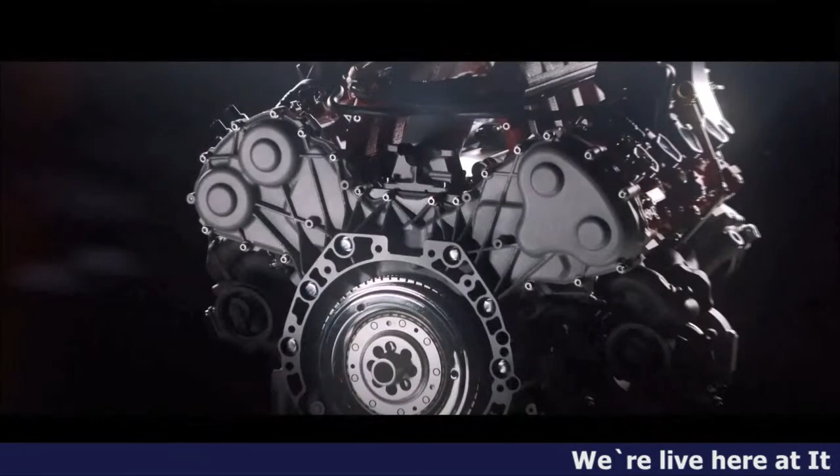Can you imagine the cars and the motorcycles of the future? Will they be connected to everything? How will their design change? How will the engine of tomorrow work? Maybe motor vehicles will turn on just with a glimpse, or be as fast as your thoughts.

The truth is that imagination requires talent, but above all, skills and training tools that only a great university can offer. This is the reason why MUNER, the Motor Vehicle University of Emilia-Romagna, was born.

A campus as big as an entire region, where the brands that made the history of the automotive industry and the main universities of Emilia-Romagna merged together to design the 7 automotive engineering careers of the future: electric vehicle engineering, advanced automotive electronic engineering, advanced powertrain, advanced motorcycle engineering, advanced sport car manufacturing, high-performance car design, racing car design.

All of them under 3 master's degrees with an innovative learning by doing approach. The most famous automotive companies in the world put their know-how and the most innovative technologies at the service of students, to train the engineers of tomorrow directly through their professionals.

With MUNER, the most talented students will shift from designing to testing within the most renowned manufacturers, with the skills of those who are already pursuing the future and bringing it forward. Start here and keep writing the history of two and four wheels.

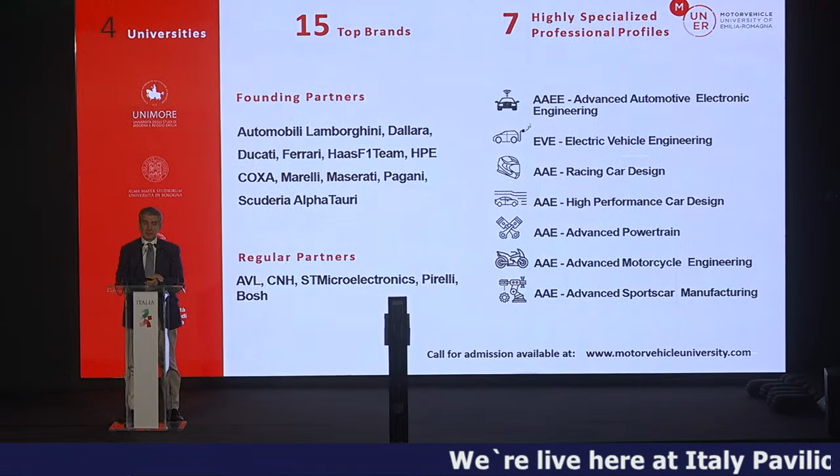And now an interesting thing is happening. We started with 10 founding partners that we mentioned before, and then the biggest brands in the world started to ask to join us. And we know that innovation means openness. You can be innovative only if you are open.

When I was the president of IBM, we did a study asking 1,000 CEOs of different companies: where do you take your innovative ideas from? And you know, only 30% of the innovative ideas come from the employees. 70% come from outside. And so we have to force openness if you want to have a future.

And this is why we have added these regular partners that are selected by us, because we have a lot of requests, so we carefully choose who could be the partner. We have AVL, CNH, ST Microelectronics, Pirelli, and Bosch, who asked to join us.

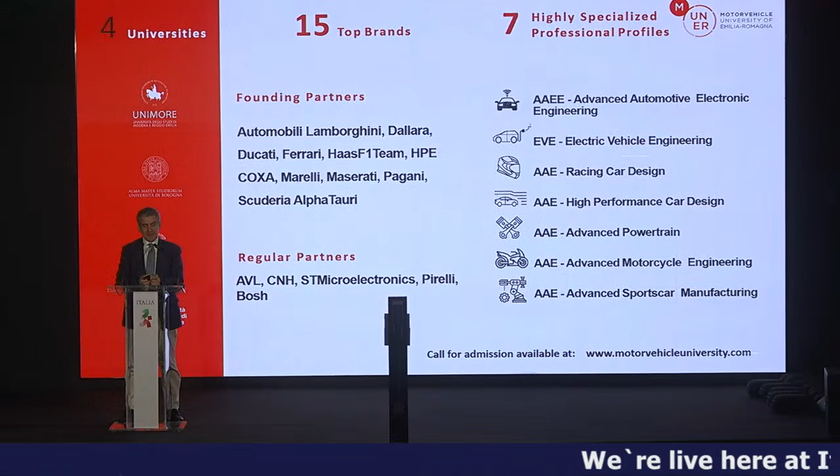And then you see here that we started with 6 professional master's degrees. Now we have 7, and next year we will have 8. So we are enlarging also the kind of knowledge that we have.

And here it's very important, also the practice. I think you will experiment later with some of this, what is the meaning of learning by doing. And this was really a big effort from our companies, because we forced ourselves to have companies designed to be visited. So you can come to Ferrari, to Lamborghini, to Dallara, to all the others, and you can visit the company, and the students come and use the tools that we are using normally.

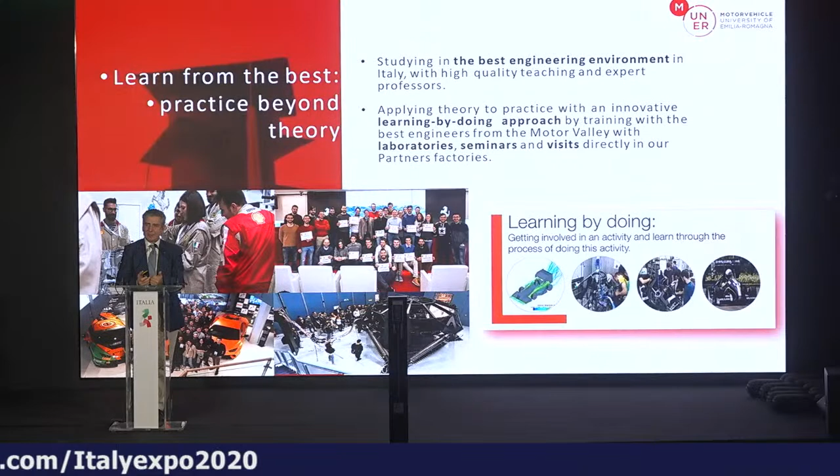The wind tunnel, the driving simulator, the bench tests for Formula 1 engines. And you know, this is something that you can only maybe see a picture of otherwise. And here are tools that you are using every day. This is very important, I think.

This is where we are now. 90% of the graduates are immediately involved in professional activity in the automotive sector. By the way, 100% of the people find a job before they finish, and 90% of them are in the automotive area.

More than 20% are non-Italian, and we want to have more of them, and this is why we are here, because I want more students from abroad—diversity is the name of the game for innovation. With Stefano Domenicali, the Formula One CEO, we have agreed to offer scholarships to increase gender and minorities representation in our program.

So these are all the things we are putting together, and now I'm working on another project with Formula One again, to bring the Formula One flavor to schools, not just the university. We want to announce this next year, and it's important because we have to find early enough the people with passion for STEM—science, technology, engineering, and math—because if we wait too long, we lose a lot of that passion. So we want to have this.

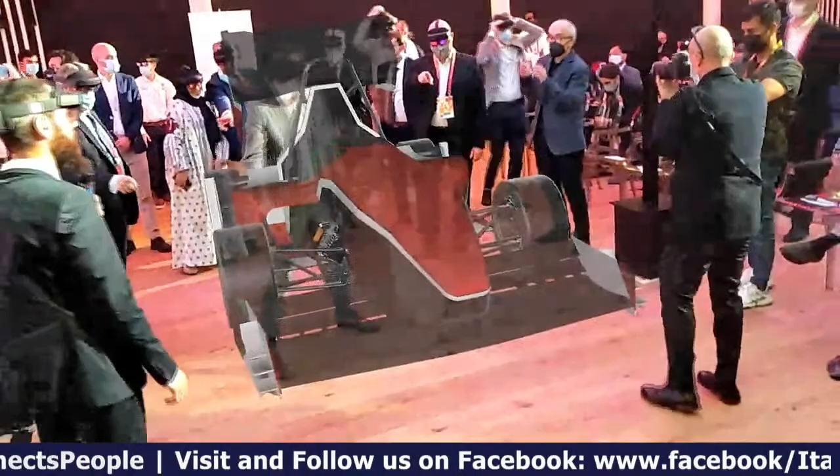Ok. We are ready. You can all see on the screen what we are watching now. Okay, let's start this very short presentation, very short demonstration of this virtual reality. We are going to show you this first car - it's a Formula SAE car.

There exist different types of Formula SAE car, electric car and combustion car, and this is the only car in the world which mounts a hybrid power unit.

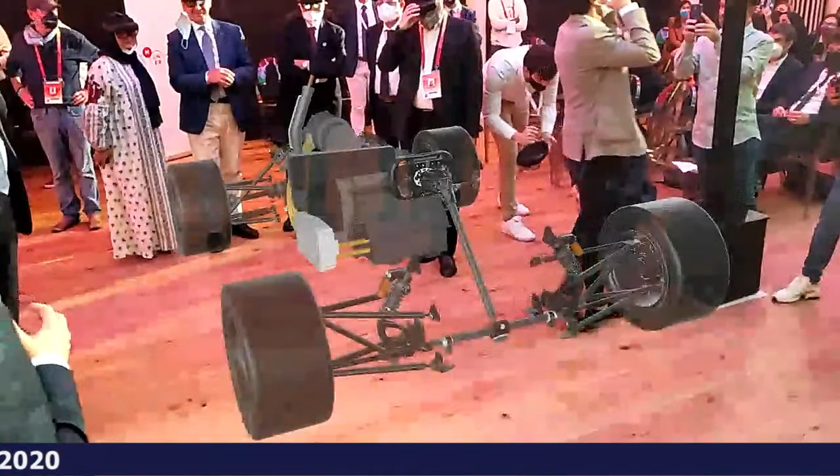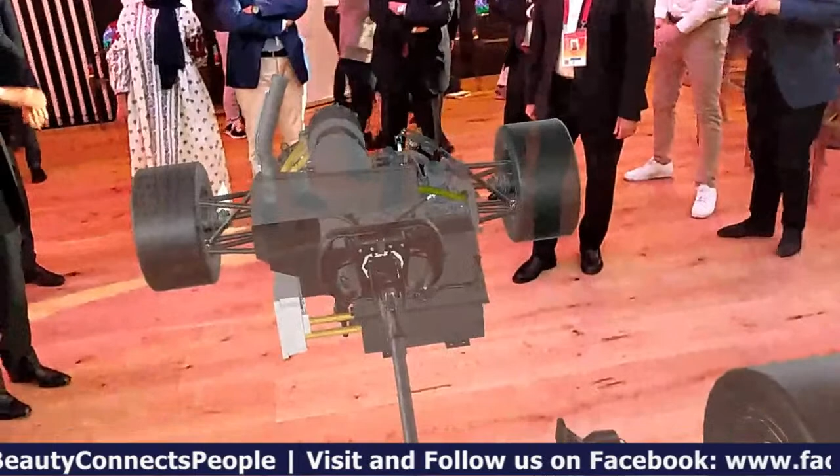As you can see in this other representation of the vehicle, these are the components of the hybrid power unit. Here is the internal combustion engine, the electric motor, and here highlighted you can see the fuel tank in yellow. In this animation, you can see also the fuel flowing to the internal combustion engine, representing the flow of energy passing through the chemical energy of the fuel, converted into mechanical energy by the internal combustion engine.

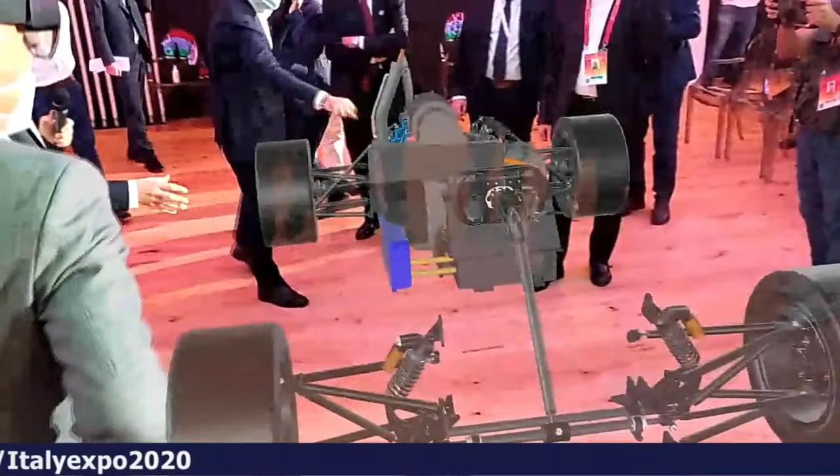Let's now focus on the battery pack, highlighted in green. Here you can see also the flow of energy passing through the battery toward the electric motor converter. This component is the inverter, which is able to convert DC current into AC current and deliver it to the electric motor. The electric motor is directly connected to the internal combustion engine.

It's a very particular architecture, and the energy is then coupled between the electric motor and the internal combustion engine, converted into kinetic energy of the vehicle passing through the transmission system, highlighted now in blue.

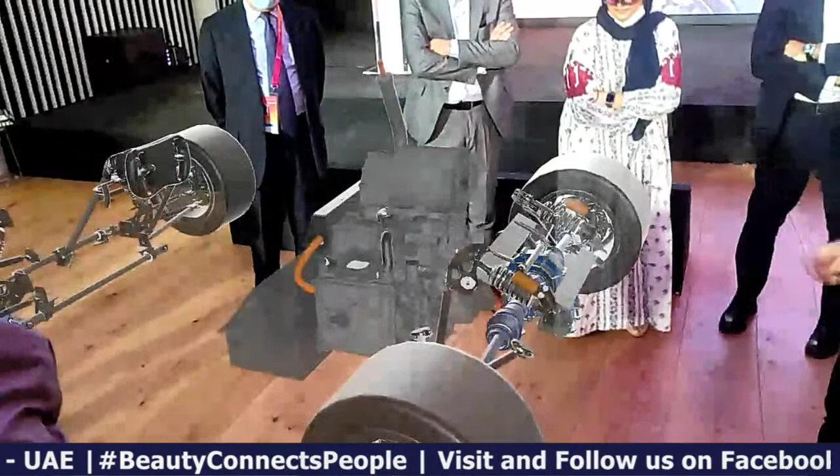At the same time, we can also consider the braking system of a hybrid vehicle, where the energy passing through the transmission is then converted in the reverse direction, passing through the transmission, then to the electric motor, and converted again into DC current in order to be stored again in the battery.

We need to be very quick in order to show you other features of this very important and useful virtual reality. My colleague now is going to show you a simulation of an assembly of another type of vehicle.

Okay, so this is a different car from the one before. The difference is that this car is fully electric, and I will show you in particular the accumulator battery.

Now we can see the core of the battery. We call it a module. It's composed of a battery management system. The cells are the cylindrical lithium ones that you see in pink, and then the cubic material that you see in blue is called PCM material. It absorbs the heat spread by the cells during the race and allows us to keep the cells at a constant temperature throughout the whole race. At the end, you can see the chassis of the module that keeps everything in place.

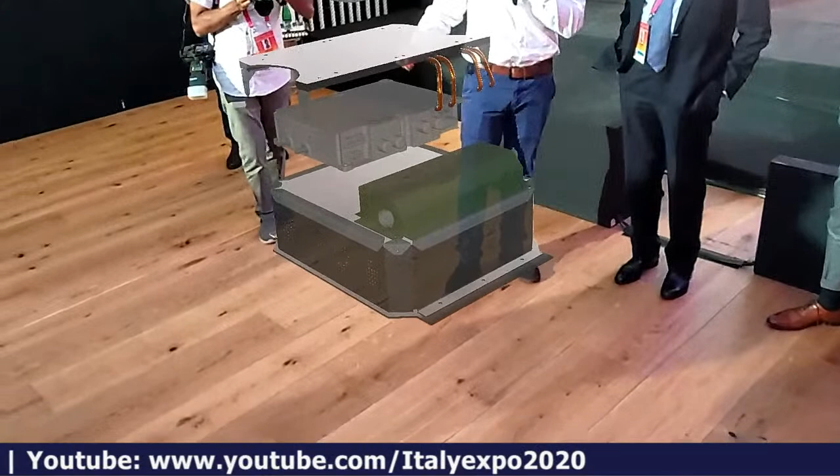Now we see the conversion of energy from DC to AC. Those boxes that you can see on the battery are the inverters that convert the DC power to AC. Everything is placed on a shelf.

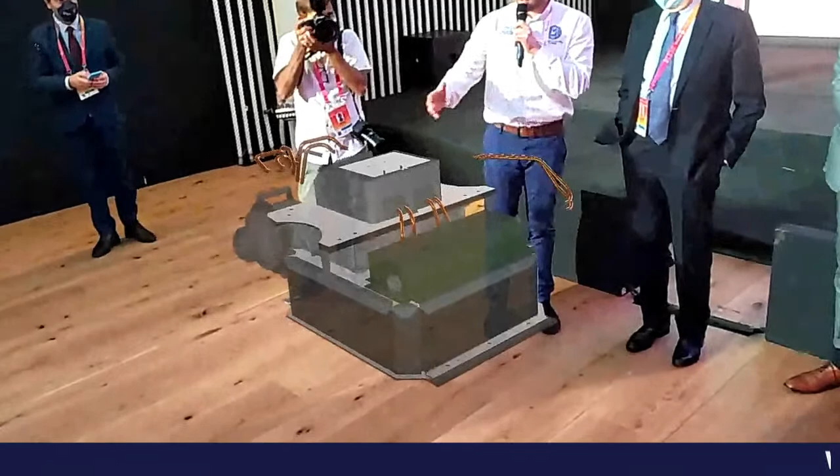Now we add the motors and the planetary gear. Those motors allow us to give the car 1,000 Newton meters of torque and a maximum speed of 100 kilometers per hour.

The whole powertrain is cased in the chassis, which is a carbon fiber monocoque. And now we will mount the aerodynamic devices and the suspension system of the car, which you can see assembled here.

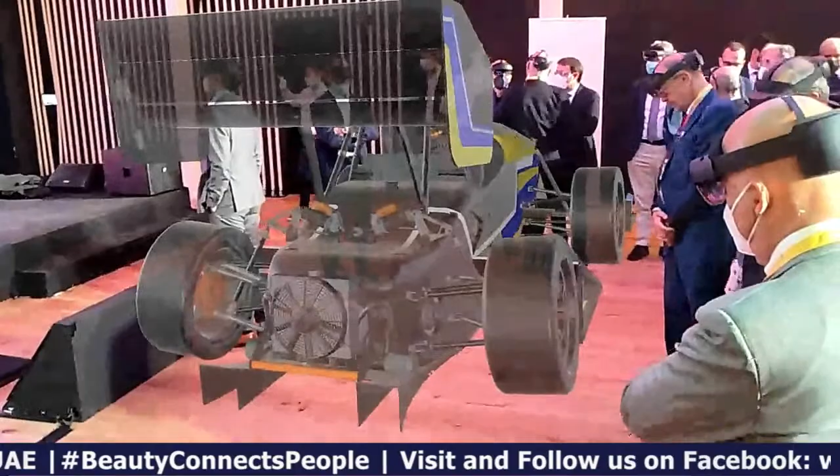Now I'll let the next person talk about the anechoic chamber.

Thank you. Yes, I'll be quick and try not to be too technical. I will just talk about the testing we are doing regarding the automotive sector, but for any kind of sound sources. I will show you some hints about the acoustic characterization of motor vehicles.

And I will start by playing a short video of an anechoic laboratory in Ferrara, at the engineering department of the university. You should see the video popping up above the motorcycle, just on top of your head.

This is a room we use in Ferrara to characterize sound sources and to measure and record the signal, which is not influenced by the surrounding environment.

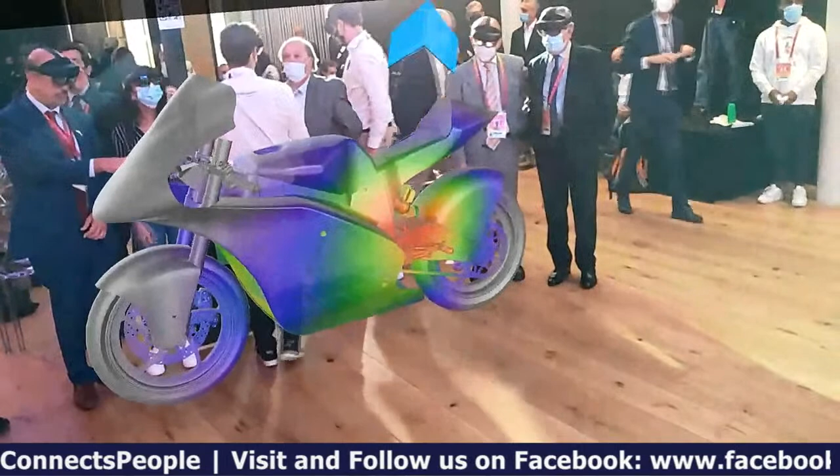So it's quite annoying. I'll stop that for you. And that was it. I'll stop my presentation now.

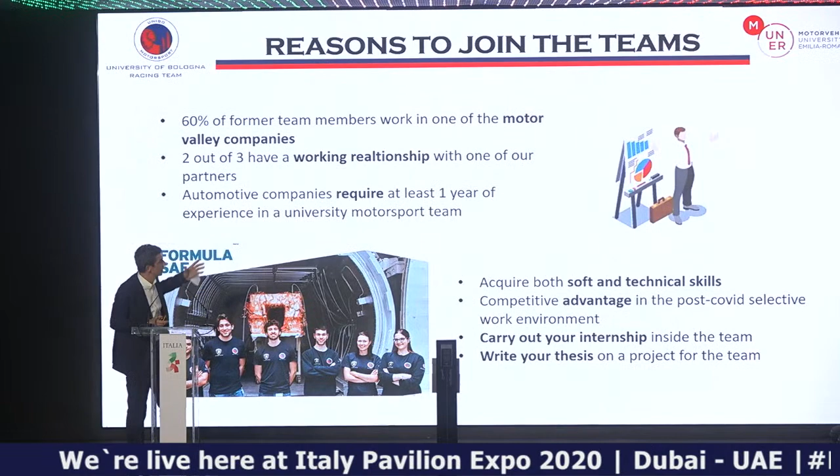There are several reasons for students to join this type of educational program and participate in projects such as Formula SAE and MotoStudent. Companies today require these skills to be developed within the university, and that makes the difference, because graduates from these projects have already lived an experience similar to what they'll face in a company, but in a smaller, much more open environment. So they arrive at companies with fresh ideas and want to innovate, but they've also seen the hard part, so they know exactly how hard it is to translate ideas into actual vehicles and components. These are the skills really appreciated by companies.

I'm going to go a little faster and present a case study: the University of Bologna Motorsport team, similar to teams at other universities. At the moment, our team boasts more than 150 students working on 3 different projects, 2 cars and 1 motorbike.

I'll go quickly through the next slides to show a bit of what the students really do, what topics they develop, what type of research they're doing, and the complexity they deal with.

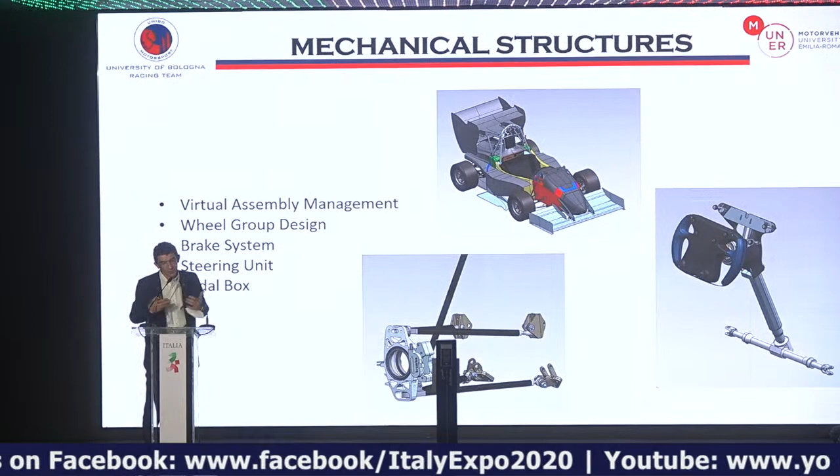From the mechanical structures point of view, they first need to do the virtual assembly of the entire vehicle, so a lot of activities are done via software. That's how we want to design things today. Then, in a software environment, the students design and verify all the components before starting the design and production phase together with their supporters and the companies that are part of the project.

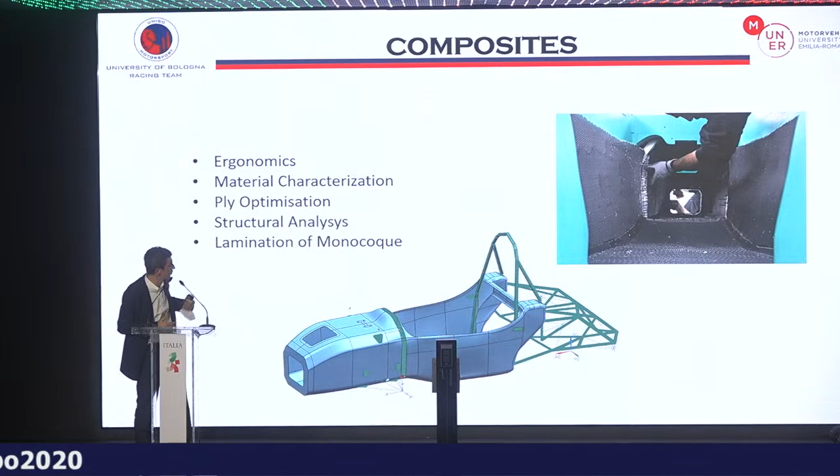Composites is another big division. The students do the framework and the chassis, developing it with their own hands within the company, so they learn how to use this innovative technology.

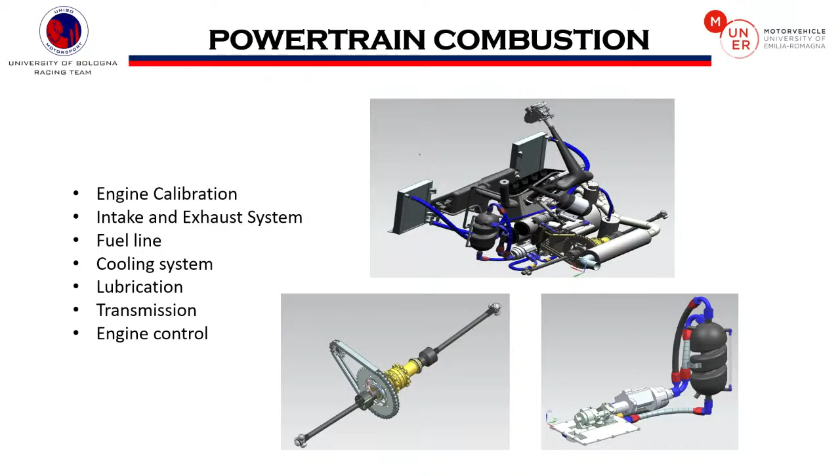The powertrain combustion division is one where our team spends a lot of energy, because one feature of this approach is that the engine control unit is fully open software. The students design all the parts of the software, test them in a virtual environment, and then go to the test bench where, with a real engine modified typically from a motorbike or motorcycle type engine, the intake, exhaust, and main components are modified by the students, then tested on the test bench before installing the entire powertrain on the vehicle.

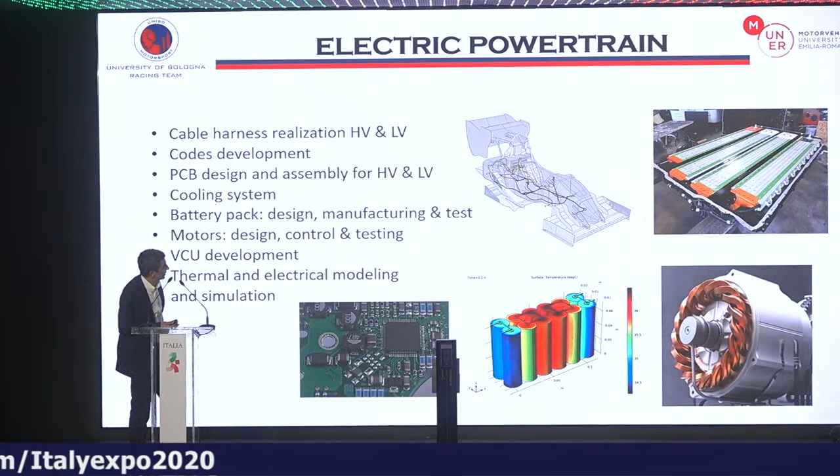Electric powertrain is the most recent activity we've been doing in recent years. You've seen the assembly of an electric vehicle in the augmented reality demonstration that preceded this presentation, so I won't spend too much time on it, but it covers everything from the cell choice to the pack assembly, to the testing, to the test bench of the electric motors, and finally onboard the vehicle.

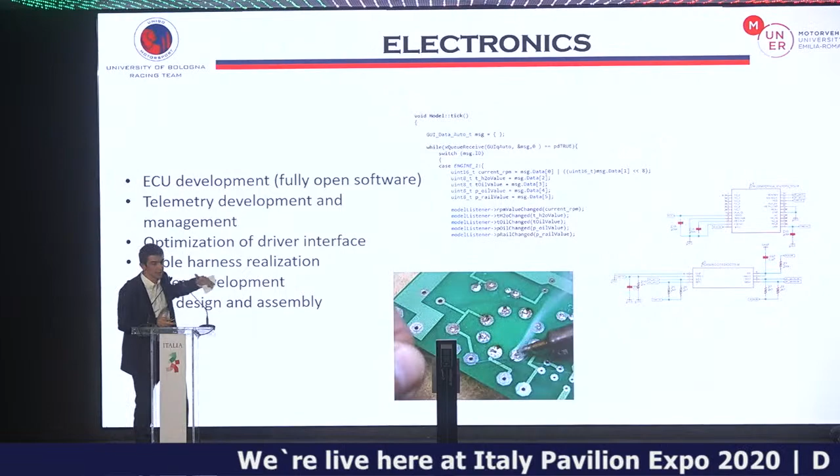Electronics is a transversal division, so it's both hardware and software.

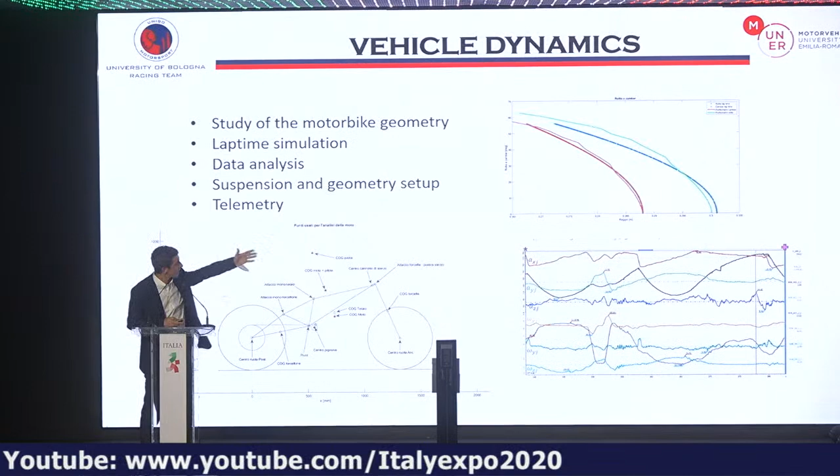Vehicle dynamics, again for the motorbike, from scratch, from the start. We have a great partner, Ducati, that helps the students identify the main elements of vehicle dynamics before the vehicle is even designed in a three-dimensional way. And then, of course, up through the whole process, up to the telemetry on the racetrack to verify that the design was successful, or to go back.

Finally, marketing department, extremely important. The budget is significant, and the students have to deal with companies to raise sponsors, to raise money to fund their projects. This is one of the things the students do. They organize events for the companies, they participate in the competition, and the marketing department is very important, as well as the communication department.

Also, part of the race is not only on track, but is also evaluated based on the cost event business plan presentation that the marketing department typically takes care of.

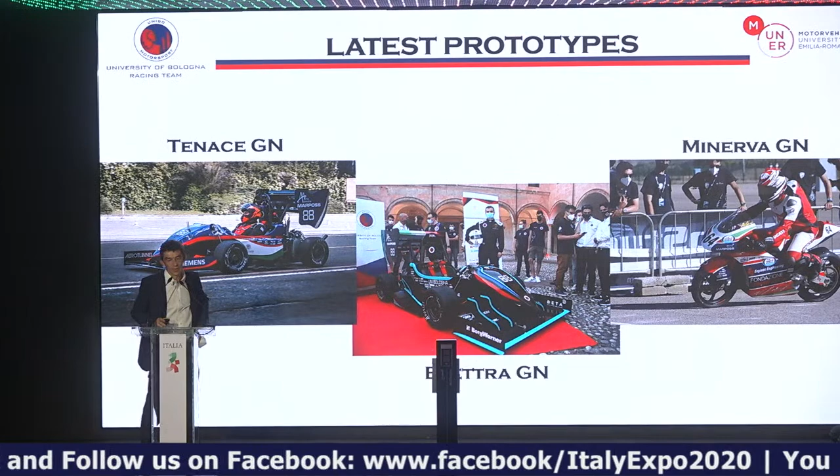Some results from the last season, this year actually. Last year we could not race. So this year we did very well in the only officially held event, MotoStudent, and the University of Bologna achieved first position, and we did quite good also in Spain with third position in Formula SAE combustion.

We also did virtual results and virtual races during the COVID pandemic, so we never stopped. The workshop was always open with a lot of testing taking place and all the safety measures we could put in place. So we did participate in virtual competitions with quite good results.

Finally, our main sponsors: Lamborghini Squadra Corse is the main sponsor for the Formula SAE departments, and Ducati is the main sponsor for the MotoStudent department. And of course there are many, many others, so here I'm just listing the main ones.

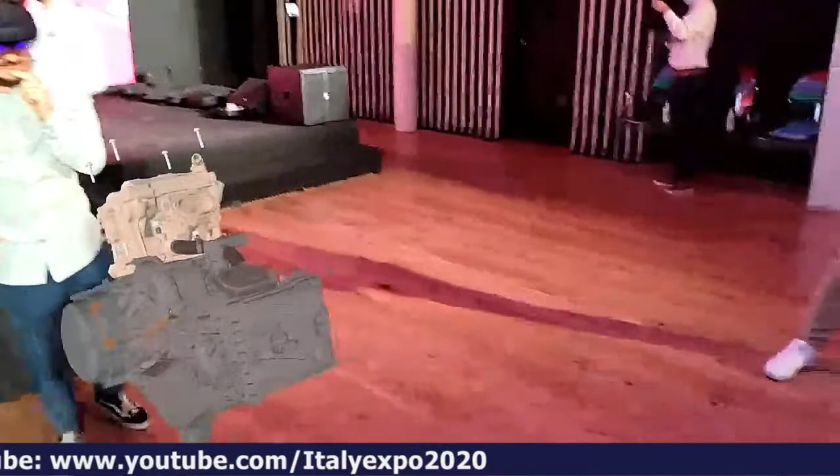We start with the engine. The engine you see here is a Ducati 959 Superquadro, a motorcycle engine. To make a hybrid power unit, we have to modify this engine by removing the vertical head and replacing it with an electric motor.

To remove the vertical head, we have to remove all the screws that hold the engine head to the crankcase. Once removed, we have to remove the chain tensioner, the object you see here on the left of the engine. Now we are able to unplug and remove the vertical original head.

The electric motor is directly connected to the crankshaft through the transmission chain of the valve train. So we remove the original upper wheel, and we have to replace the original studs with shorter ones to better fit the electric motor case, which is a 3D printed aluminum case designed for our electric motor.

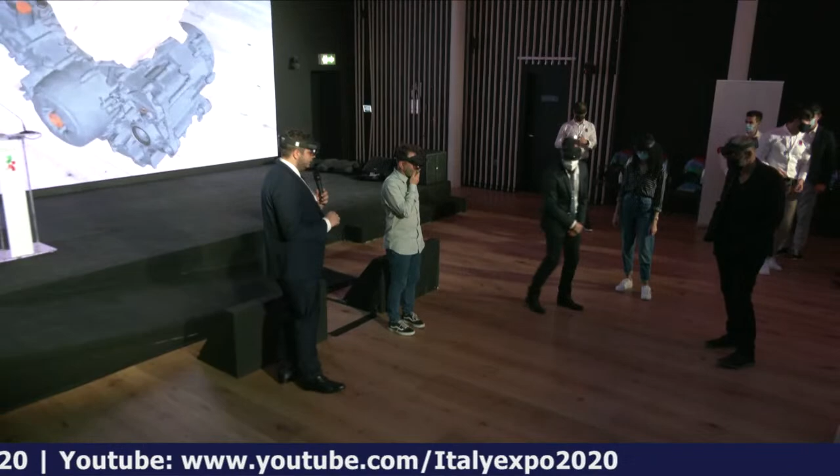Once replaced, we are now able to insert the electric motor and connect again the modified upper wheel of the chain tensioner of the chain valve. Now we put again the screws that hold the electric motor to the crankcase, on the left and on the right side of the electric motor.

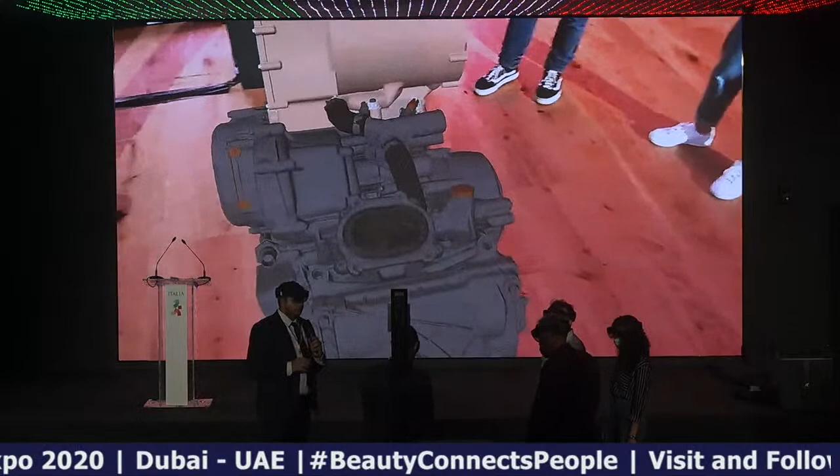And we put again the chain tensioner to precharge the chain, because the electric motor is designed to keep the original engine as much as possible. Now we close the chain with a cover, and the hybrid power unit is built and ready to install on the car.

If there's no question, we can skip to the flow of energy of the hybrid car.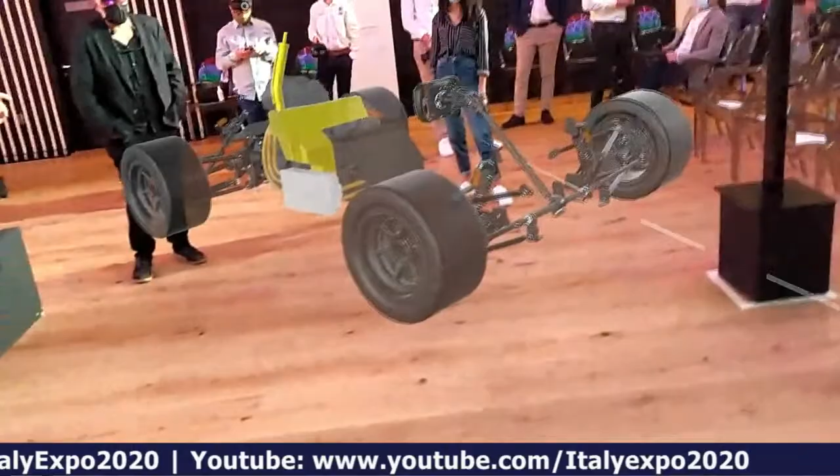Starting with the car, we can see the main components we have on a hybrid car. The yellow one is the fuel tank, where we store the fuel. The first flow of energy is the fuel being converted inside the internal combustion engine. The green one in front of you is the high voltage battery that sends DC current to the motor driver.

The motor driver converts the DC current into three-phase current for the electric motor. Now the power unit elaborates the true power and sends it to the transmission box to be delivered to the wheel.

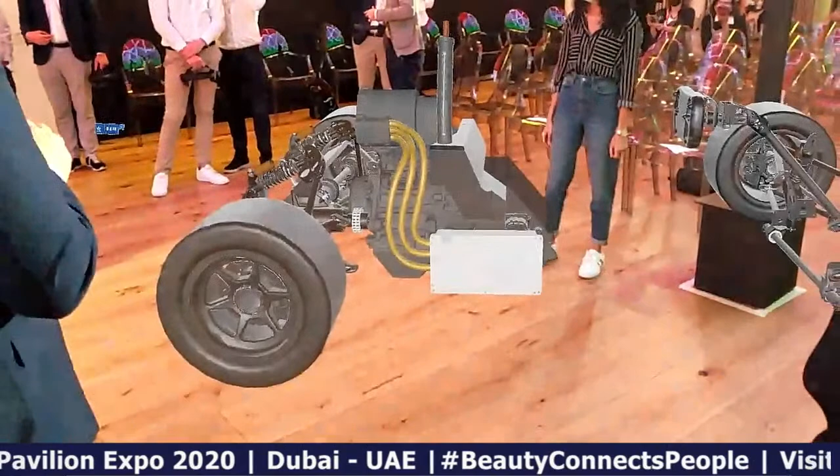Now we are seeing a braking phase of the vehicle, where the energy from the wheels goes directly to the transmission box and to the power unit. Notice there is no flow of energy from the fuel because the engine is switched off, but you can see the flow of current from the electric motor directly to the motor driver, which converts the three-phase current into DC current to be stored inside the battery accumulator.

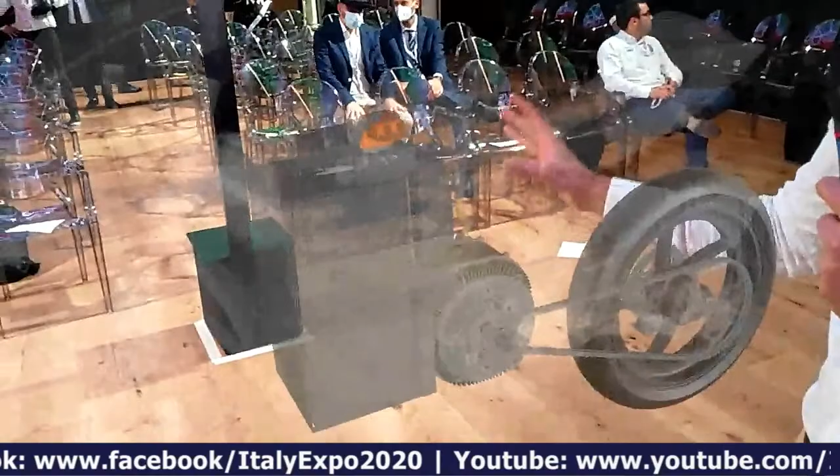Here we have our prototype, Minerva GN. It is a fully electric prototype, and here you can see all the components of the powertrain. Here we have our battery pack, with on top all the electronic and safety system, and the controller on the right. The controller is connected to the HV wiring and provides current to the motor, which leads to the movement of the wheel.

In the battery pack, we have cells that store energy in an electrochemical form, which provides electrical energy to the controller. This controller provides high voltage current to the motor, and the motor can rotate its rotor, transforming the electrical energy into mechanical energy.

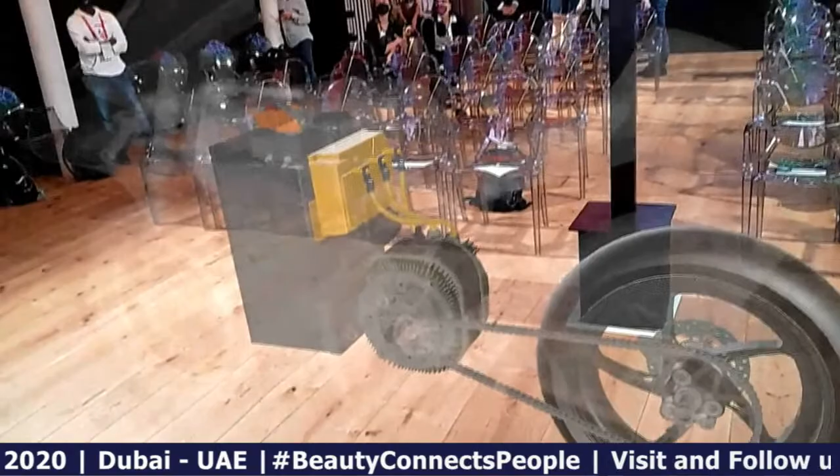So we can see here the controller providing current to the motor. Here we can see the current passing through the HV wirings, and then the movement of the rotor is transformed into the movement of the wheel.

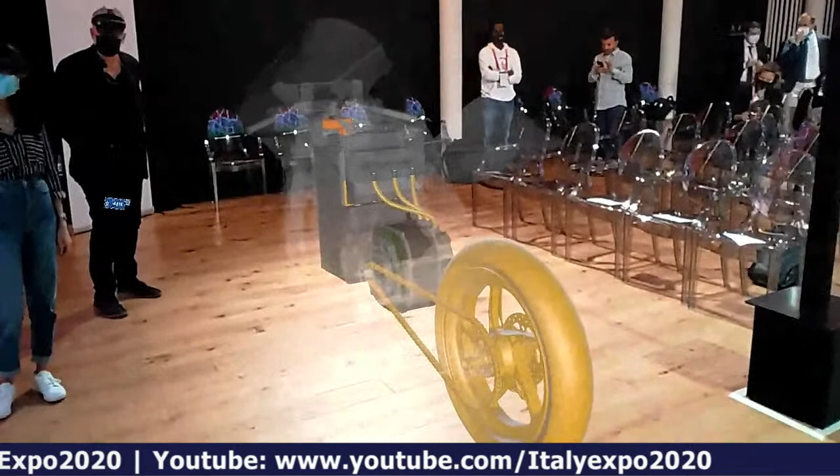This energy flux is not unidirectional, but bidirectional. In fact, we can transform the mechanical energy of the wheel into electrochemical energy. How do we do that? We do that with regenerative braking.

So we can transform the movement of the wheel while it's braking into movement of the rotor of the motor, which transforms itself into a current generator. This current generator will provide the controller with a high voltage current, which will recharge the battery pack, as we can see here.

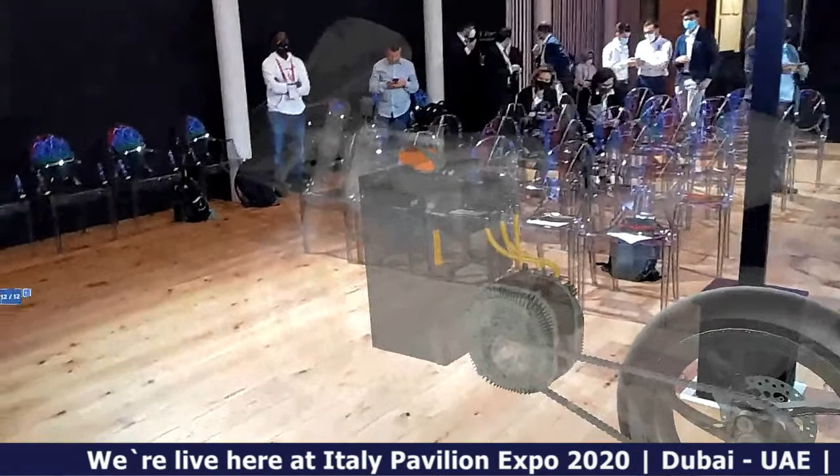So I will pass the word to my colleague for the acoustic map.

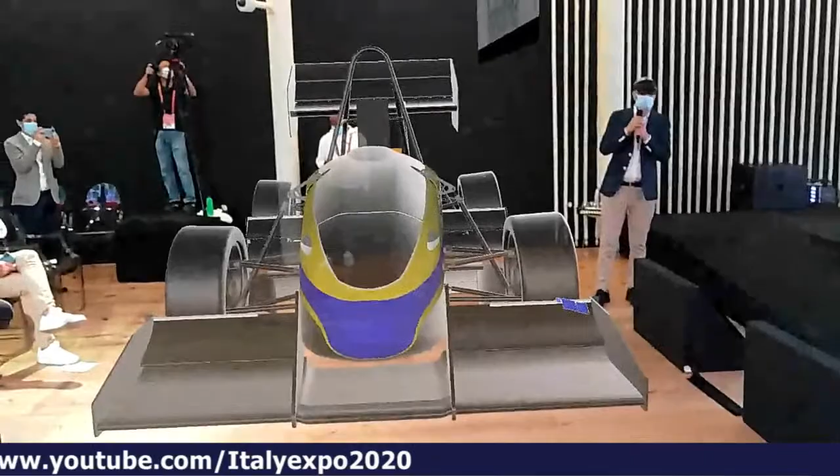At the University of Ferrara, we have a big chamber called an anechoic chamber. You will see now a brief video of that, above the car.

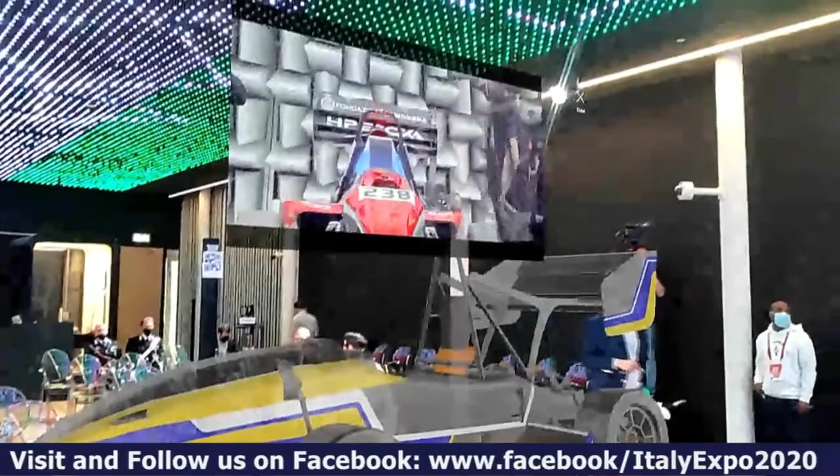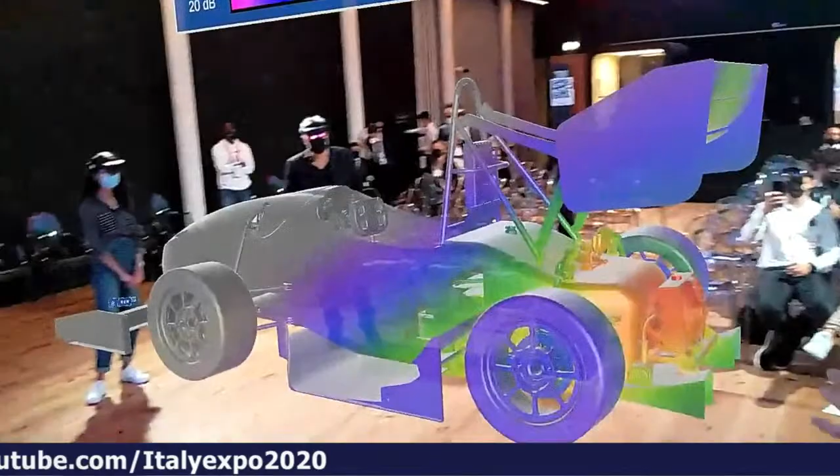Okay, so in this chamber, we are capable to isolate the sound produced by the mechanical component measured within the chamber from the exterior. So in a normal environment, every time you produce any kind of sound, your emitted noise is partially rebounded by the walls.

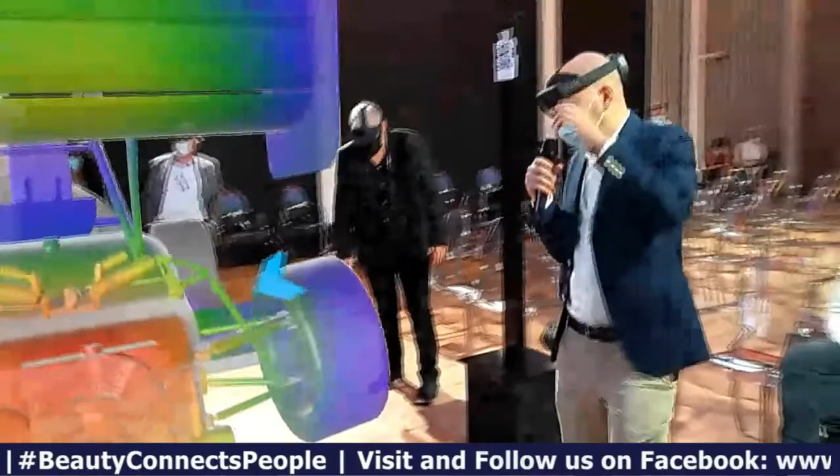So at the end of the day, you feel the merging of your emitted sound with the part that is rebounded back by the walls. In the anechoic chamber, all the emitted sound is completely absorbed by the walls, which are covered by these big wedges made by recycled plastic.

We brought the vehicles within the chamber and we measured the emitted noise. We can do that for research. We are doing that also for company consultancy, and also for students to make experience and practice with measurements.

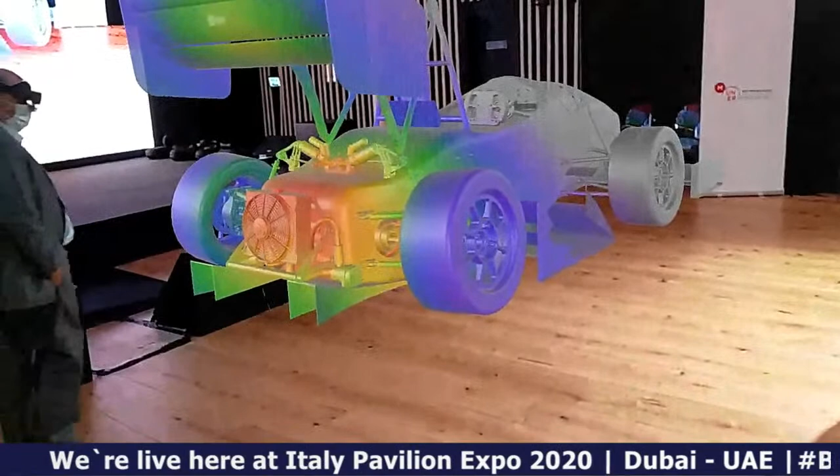And yeah, we brought the vehicle, we measured the emitted noise, and here we can see how the emitted noise by this vehicle can be somehow displayed. So the red color corresponds to high intensity sound, then blue color corresponds to the lower intensity sound.

And here we can hear what is the actually emitted noise by this car, which is, of course, an electric vehicle, so we will expect a high frequency noise. Just listen to that.

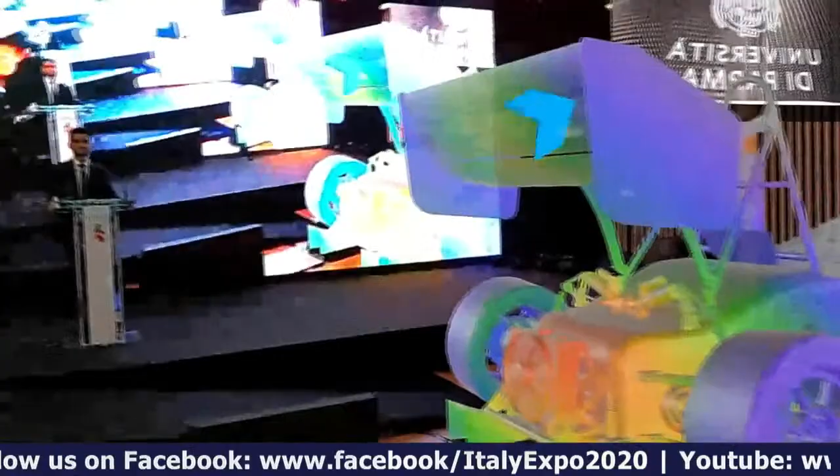You can also turn down your volume because sometimes it gets a little bit annoying. So yeah, this was just an example to understand the possibilities made by this chamber.

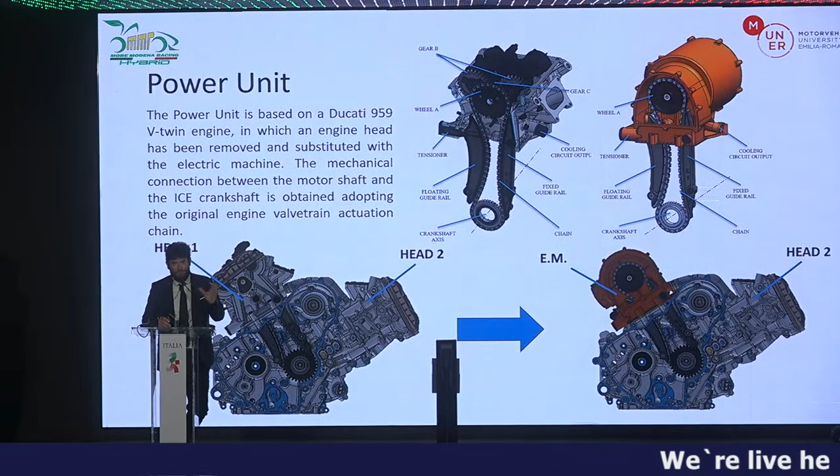An important peculiar aspect of the project is the fact that torque transmission between the electric motor and the crankshaft of the internal combustion engine is achieved by means of the original engine valve train actuation chain.

The electric motor has been custom designed, developed, and manufactured by the team, by the students, and a quite peculiar aspect is the fact that the case of the electric motor has been realized and built adopting additive manufacturing technique, exactly the same technique used, for example, to have the copy of the David of Michelangelo here at the pavilion.

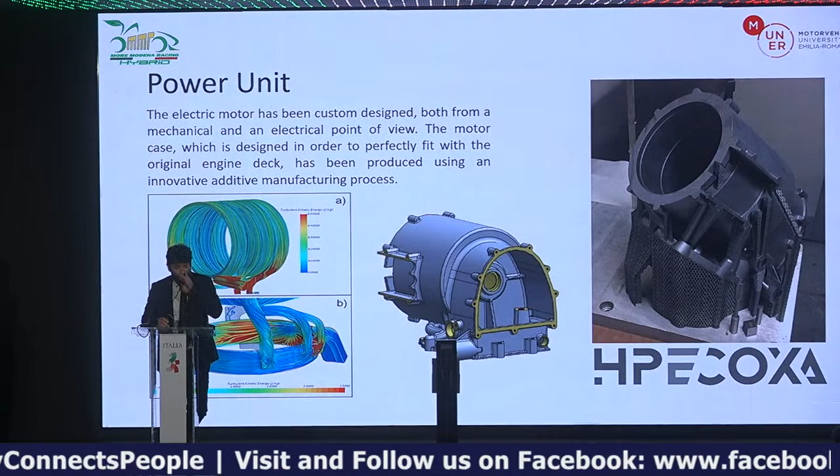The reason of adopting such an innovative technology is the fact that the design of the case is very complex, in a way to perfectly fit the original deck of the engine in order to obtain a perfect plug-and-go solution.

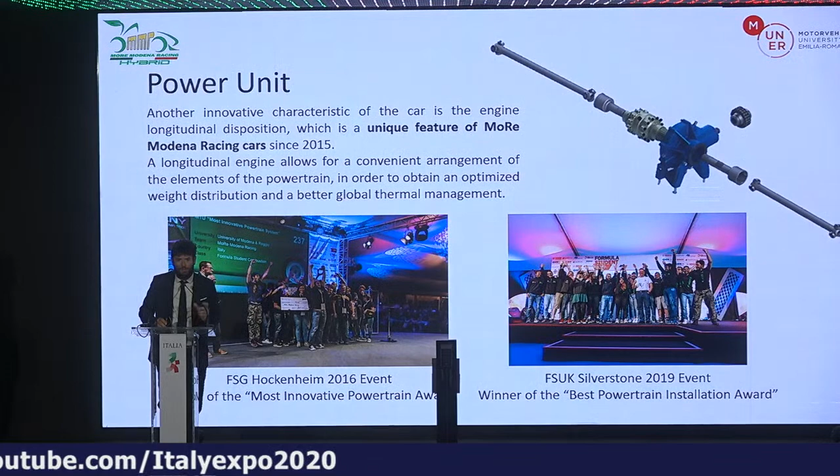Another innovative characteristic of the power unit is the fact that the engine is installed in the vehicle longitudinally. This is a unique feature of the car developed in Modena, Reggio Emilia since 2015, a peculiar characteristic that allowed the team to be awarded with several awards at different events over the years. For example, the Most Innovative Powertrain Award in Hockenheim 2016, and the Best Powertrain Installation Award in Silverstone 2019.

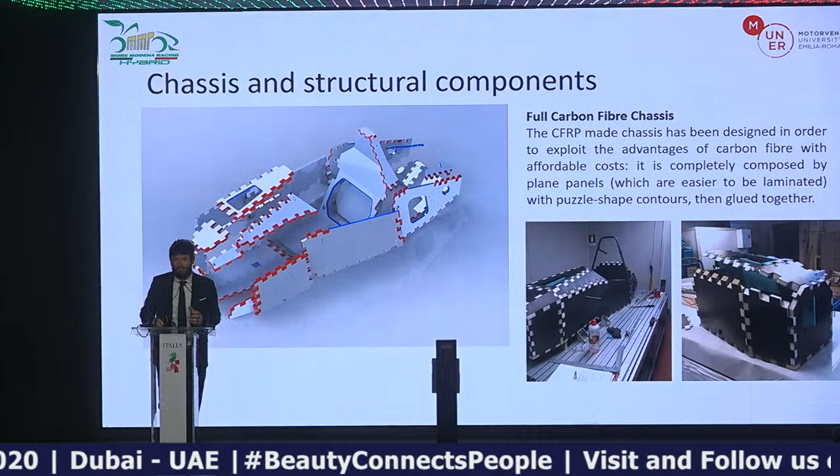The carbon fiber chassis has been designed in a way to reach the best compromise between performance and cost. In fact, instead of using classic mold-based technology, the chassis is completely composed of flat panels, which are definitely easier and cheaper to be laminated and then glued together on the outer border.

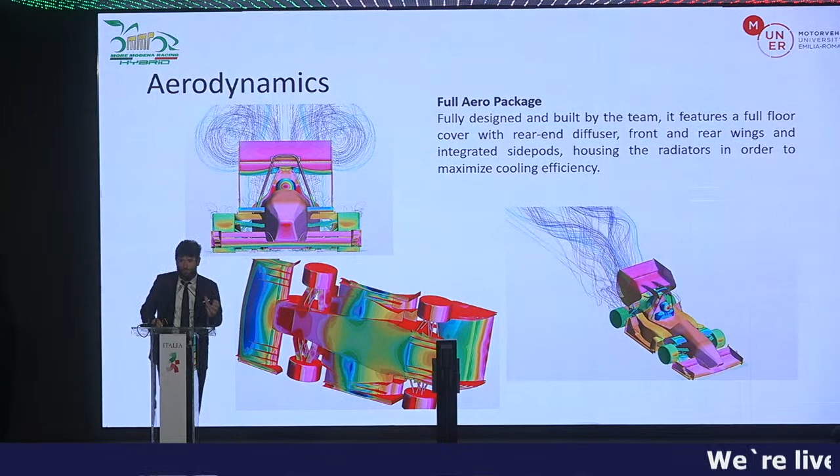Other main structural components are manufactured using innovative technologies such as additive manufacturing and carbon fiber layup, and they are all designed using advanced modeling and simulation numerical techniques. Similar simulations are used, for example, in order to optimize the aerodynamic package to obtain the best performance in terms of the ratio between downforce and drag of the overall vehicle.

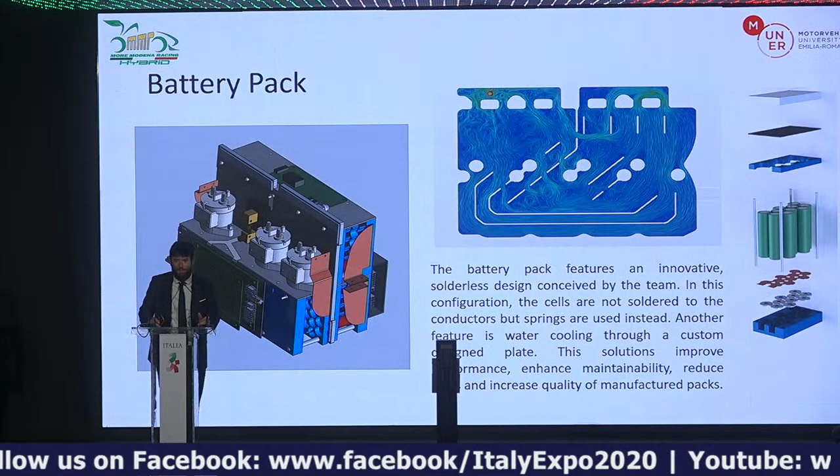Finally, the battery pack is obviously another important component of a hybrid power unit. It presents an innovative concept since it's a solderless battery pack in which all the electric contacts are obtained using a sort of axial preload on the different cells, provided by an ad hoc design cap screw. Moreover, a water cooling strategy is used in order to control the operating temperature of the battery pack, and this is obtained by the design of an ad hoc cooling plate.

I ask now Davide to join me on the floor and present the main aspects and peculiar characteristics of the full electric car developed by the University of Parma.

Our car is a direct evolution of the first electric vehicle. We started from the carbon fiber chassis that was mounted on the first electric car. It had 2 motors at the back of the vehicle, powering the rear wheels, and a battery placed right behind the driver. The second electric car, the one we just raced, has the same philosophy and concept, but was improved in every aspect by working on reliability and most of all performance. And as you can see, we reduced a lot of weight, which was part of our success.

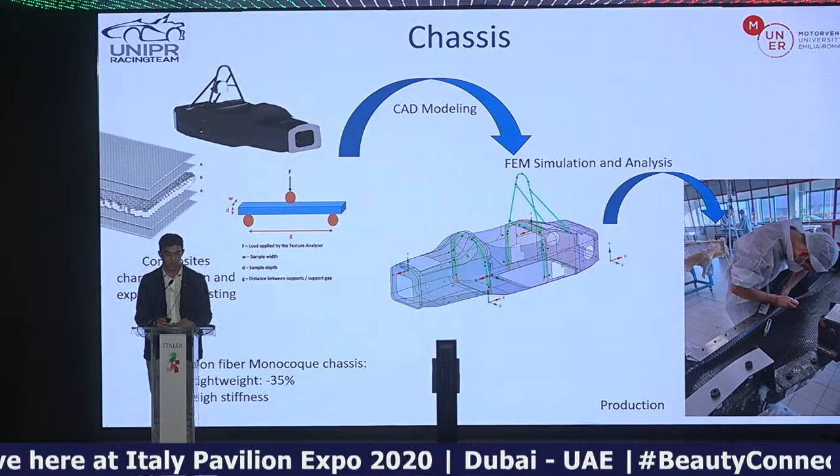I want to talk you through one of the main components of the car, how we built it. So the chassis is a monocoque carbon fiber with a sandwich honeycomb structure. We start from the design of the layup of the carbon fiber, and we do a simulation of bending tests, and then we validate those simulations with real bending tests on the machine. So we then start the CAD model.

We divided the car into multiple areas where we decide whether we want lightness or we want strength. And then we run an FEM simulation to analyze where the main stresses are around the chassis.

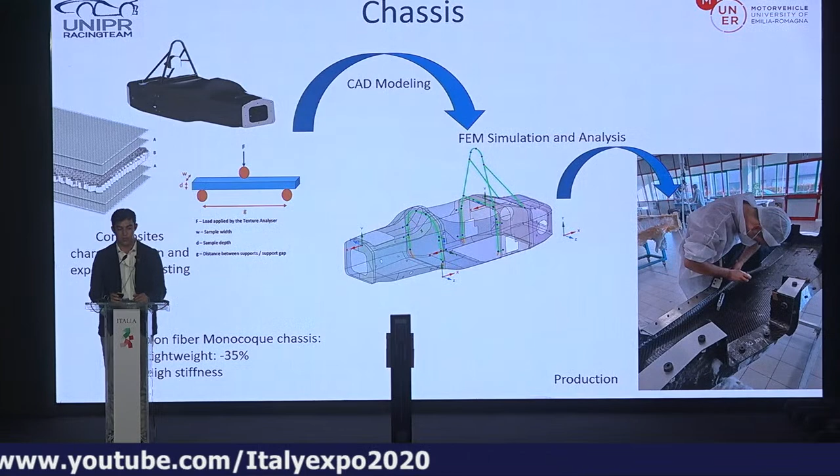When the CAD is ready, we start production. We use carbon fiber molds for our production, and we work the carbon fiber monocoque ourselves in our facilities. And here you can see one of our guys working on the first layer of the layup.

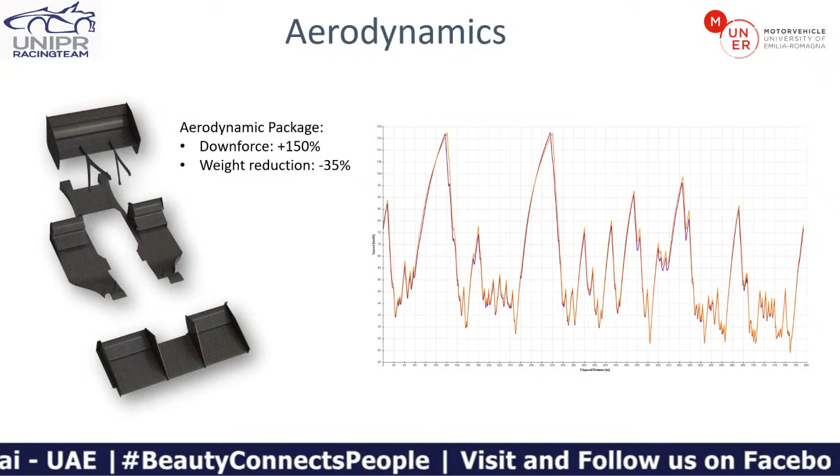Aerodynamically, we worked a lot on downforce because we wanted to achieve a higher cornering speed to reduce the lap times. In the graphic on the right, you can see a simulation of lap time with the same car, but with the older or newer aerodynamic package. In the older one, we have the purple line, and in the newer one, the orange line. You can see that the highest speeds are almost the same, but we have shorter braking zones, meaning less time spent braking. And then in the middle of the track, you can see we have higher velocities in the mid-corners.

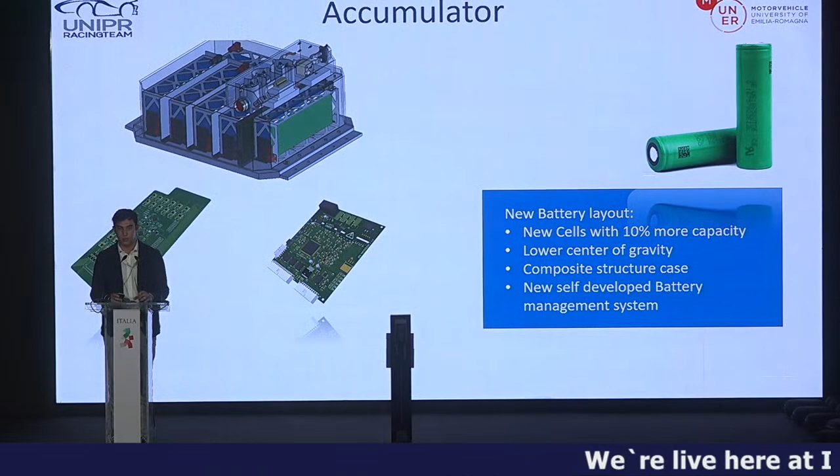In the powertrain division, we worked on downsizing the motors to 60 kilowatt motors. They are paired with planetary gearboxes, which are really lighter than traditional gearboxes, and this provides us with the same torque we had last year, but with a lighter solution. And then for the accumulator, we worked with new cells and self-developed the BMS, the battery management system. All the electronics on it were built by our own design, and this helped us have a more reliable car and troubleshoot much faster.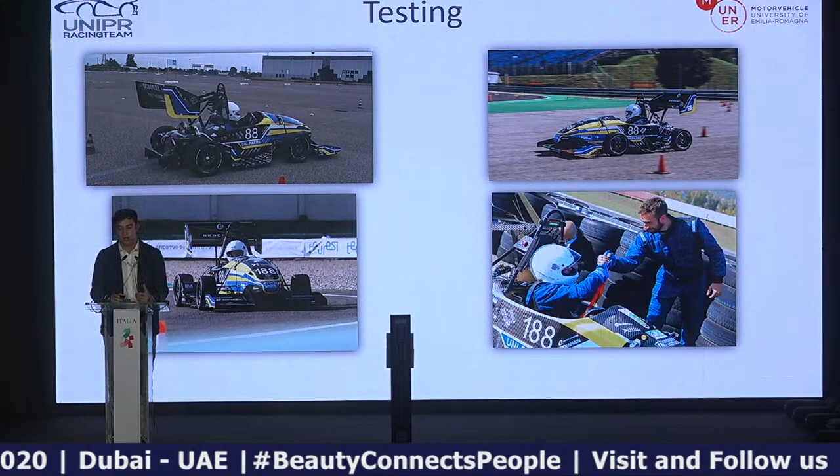Now I want to emphasize testing, because when you finish your car, you have to test it around the track to gain confidence and understand it better. We wanted to do this the right way, so we shortened the production times to have 2 months just for testing purposes, and this ultimately gave us a successful result.

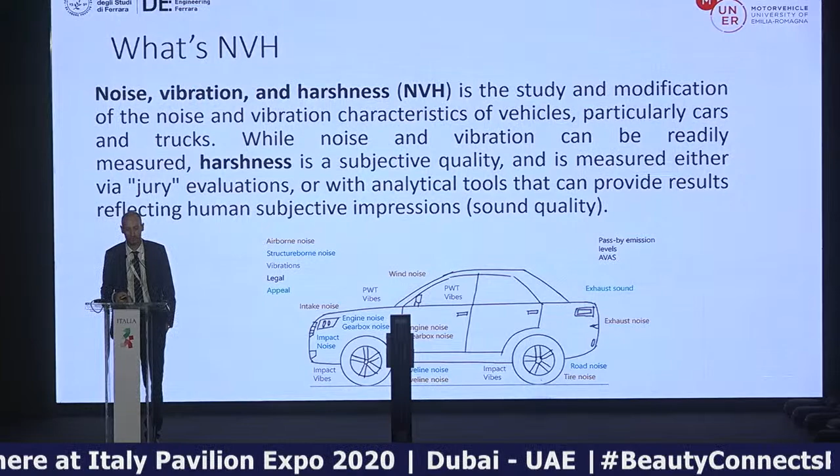What does it mean to study NVH in an anechoic chamber? This also relates to the augmented reality demo we saw a few minutes ago. NVH stands for noise, vibration, and harshness. Noise and vibration are things you probably already understand, regarding sound or the perception of vibration. Harshness, on the other hand, is a more complicated topic, but can be considered a subjective quality impression, something that regards sound quality.

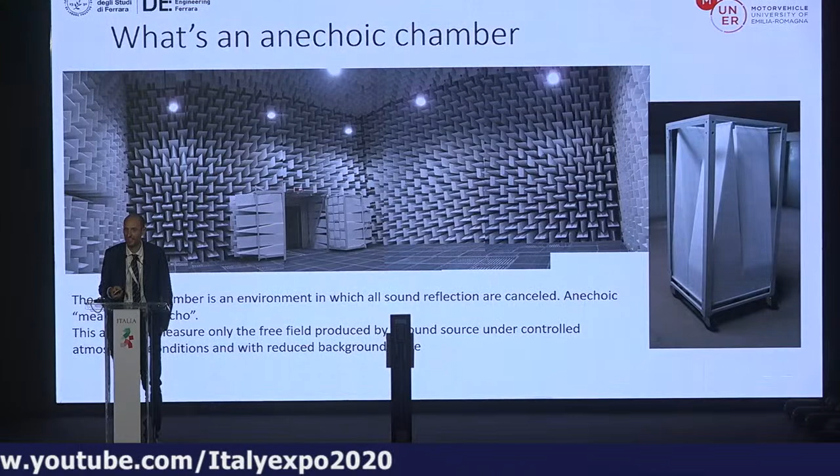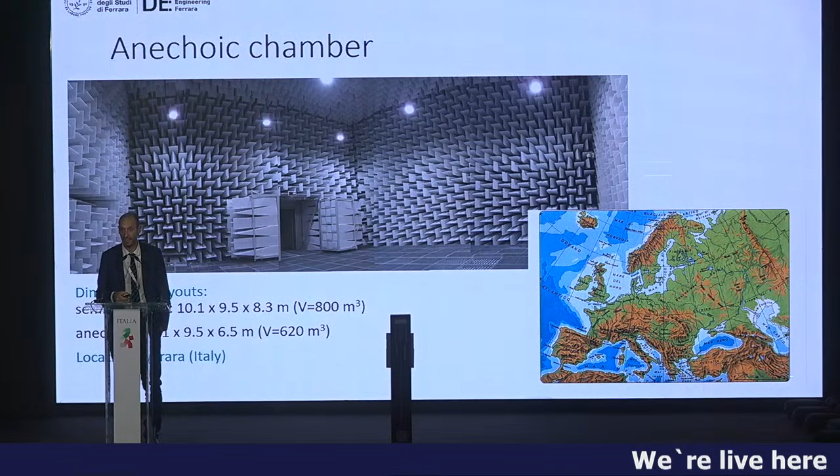Why is it important to perform measurements in an anechoic chamber? What actually is an anechoic chamber? It's a special room in which all sound reflections are cancelled. In fact, anechoic means free without echo. Here you see the big anechoic chamber present in our city, at the University of Ferrara. It can be configured into different layouts, a semi-anechoic layout or a full anechoic layout, where the floor is also composed of these kinds of wedges.

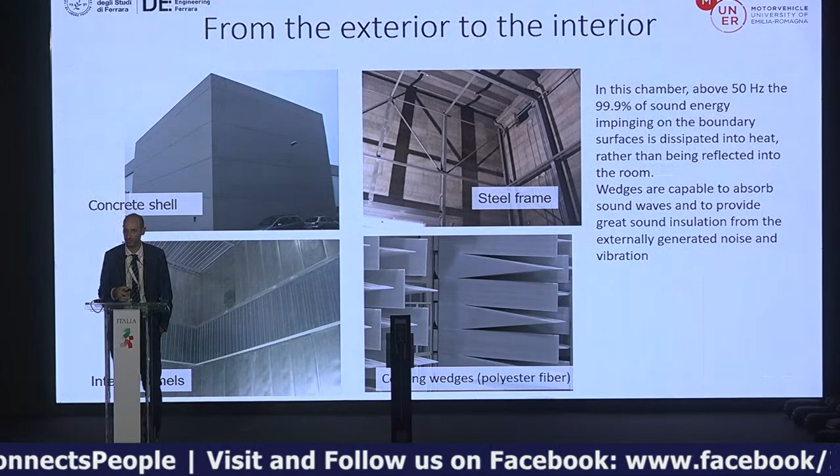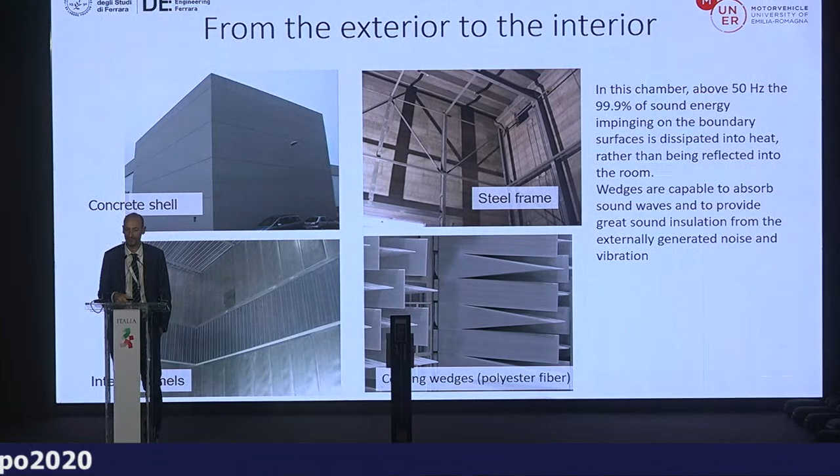From exterior to interior, we can see a concrete shell of impressive dimensions, more than 10 meters by 10 meters by 10 meters, with a steel frame internally, internal panels, and finally coating wedges of about 2 meters, made of polyester fiber. In this chamber, above 50 Hertz, more or less 99.9% of the sound energy that impacts the boundary surface is dissipated into heat, rather than being reflected as in a normal room. So the wedges absorb sound waves and provide great sound isolation from outside.

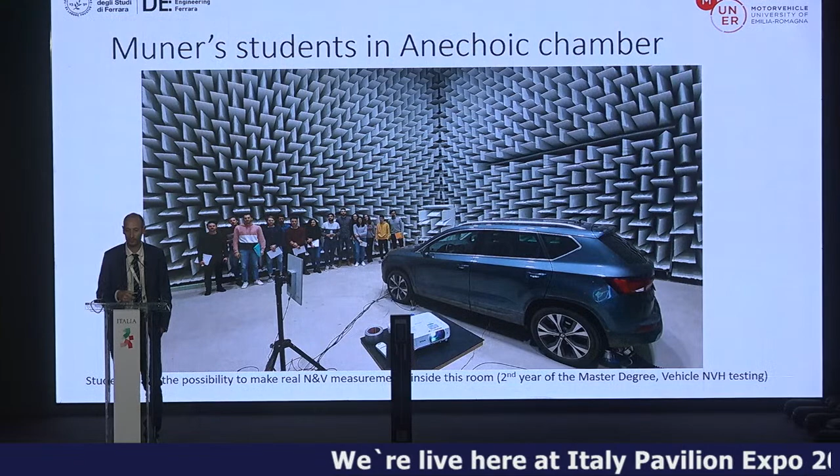Why am I presenting this special room? Because MUNER students can enter this room during lessons and practice themselves, gaining experience through a learning-by-doing approach. Students can make real noise and vibration measurements in a car, as you can see in the picture, and obtain spectrograms, plots that show the main sources of noise and vibration.

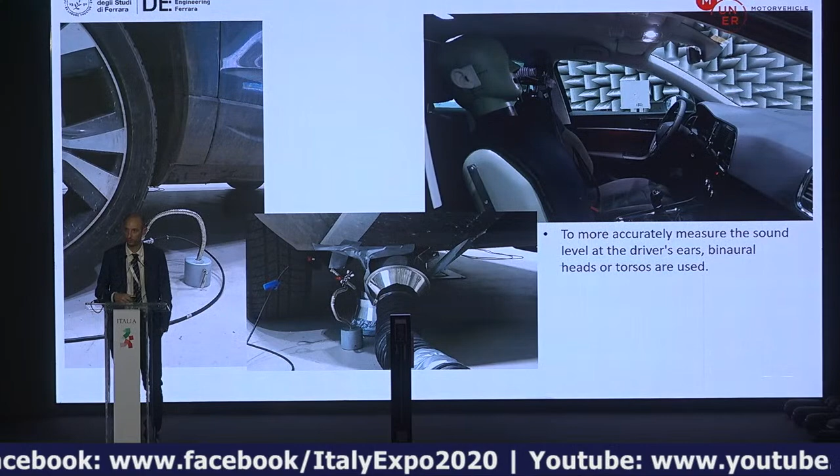Here are other details about real measurements students can carry out during practical lessons. For example, here you can see a torso with two microphones, on the right and on the left, to improve the quality of the measurement and give some impression of what a real person can feel in the passenger compartment.

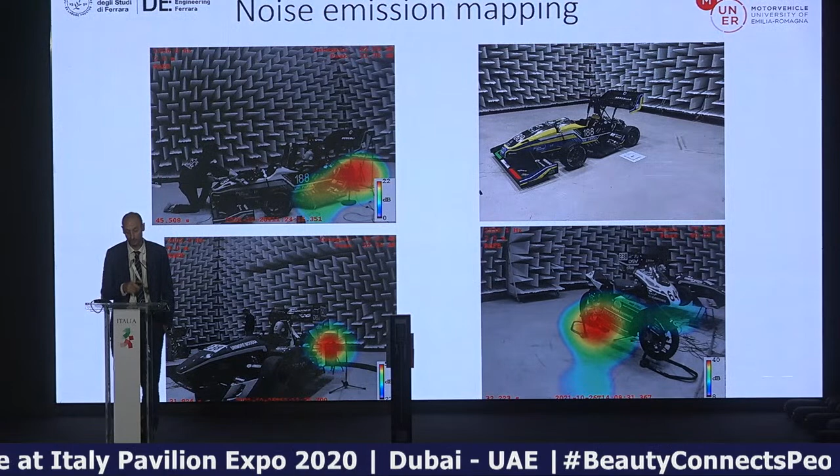Finally, one of the main results students produce at the end of their project is noise emission mapping, showing hotspots that identify the main sources of noise and vibration. In the top left, the main sources regard the engine. In the bottom right, for the motorbike in operational condition, the main sources of noise and vibration come from the chain, for example.

This is an example of the real experience students can have in this anechoic chamber. That was my last picture, so I'll conclude. Thank you.